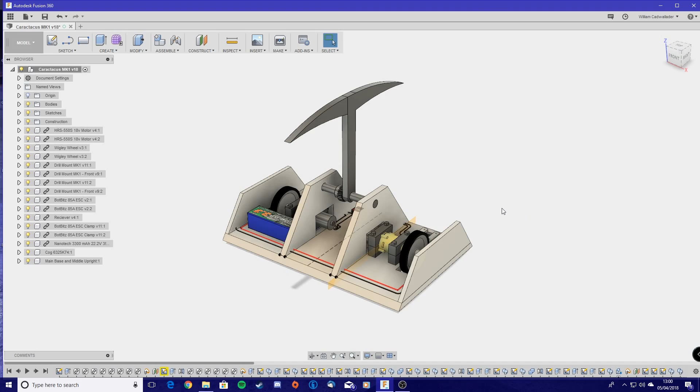So let's get going. So here we are in Fusion 360. This is the model of Caractacus that I made. It's a bit basic, there's a few things missing, but it's not too bad. I was actually thinking of submitting this for TFI's Render Wars, and you should really go check that out.

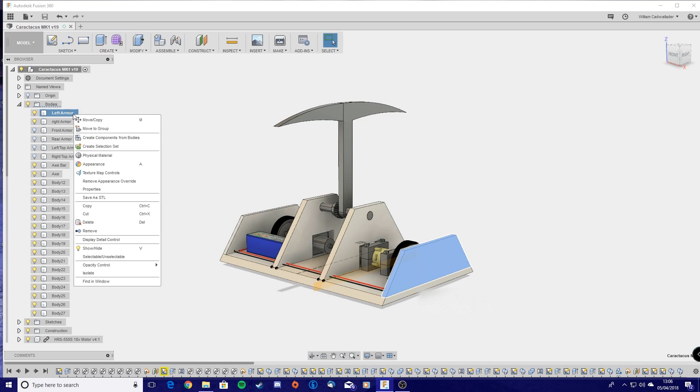So what I'm going to do first is tell it to create components from body. Scroll down here, our component will be down here, and now from here, now we've got it as a component, we can go create drawing, click OK, and then it tells you we've got the one thing.

We don't want the full assembly, so it's already selected that one part we want. Create new from scratch, that's fine. If you had templates, you can select which template you want, and then this is important.

All you've got to do here, you don't need to worry about actual paper size, because I'm going to show you how to tile that in a minute, but you need a paper size that's big enough to house your parts. So in my case, A3 is a good size to fit that.

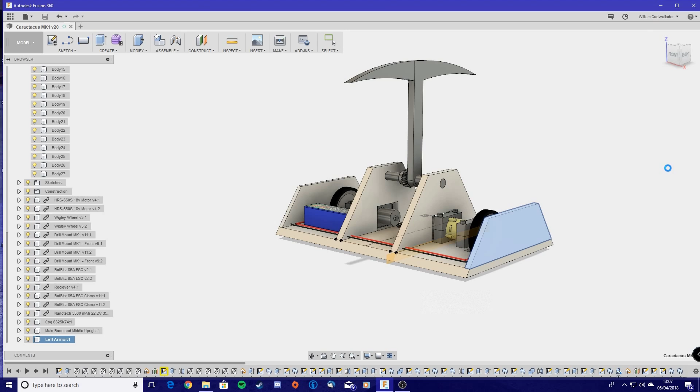So hit OK, and it'll pull us into the drawing, and then what we've got to do is select right view so we get the full view, and then because we're going to be - if you were just doing a proof of concept, you might have it like 1 to 5, 1 to 10, but we actually want it 1 to 1, so we can stick it down and cut round it. So boom, click there, that's where we want it, that's fine.

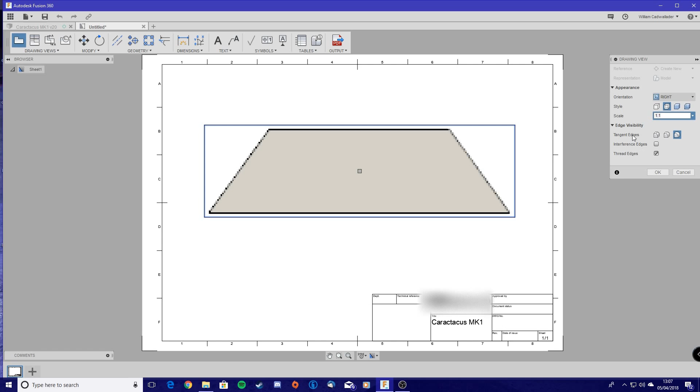That's all we really need to do there. Hit OK, and you'll see it'll pull it out and just pull that part out for us, which is perfect.

So this is an optional step, but I like to do that. If you hit D for dimension, you can select and get it to show what these dimensions are. Obviously you're probably not going to want to bother too much about measuring, but this just helps you measure the actual part itself, and gives you an idea of whether it printed out to scale. Which is also good to do.

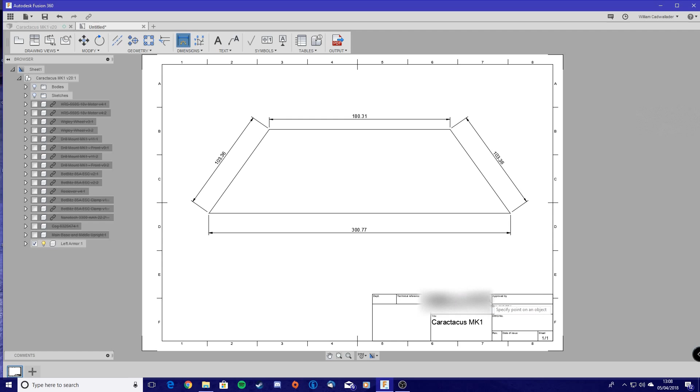And down here I'm just going to double click this, and change a few things. So what I just did there was add to the title so I know what part it is, and it also gives you the date, name, whatever. You probably saw my full name before, but I just shortened it because I can't be bothered to have my name overlapping everything. So yeah, that's all we need to do now.

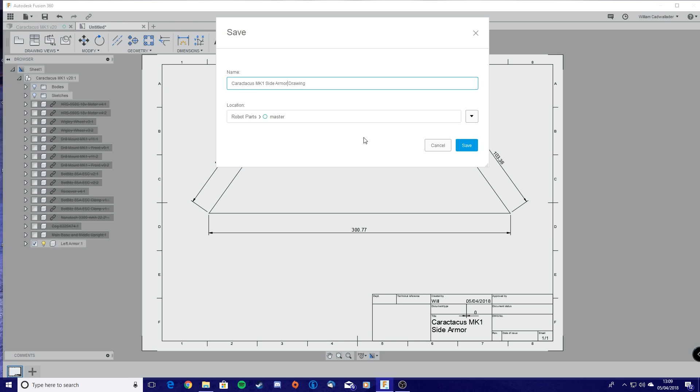That's literally it. So if we then hit - I like to save this as a drawing. If we put it down here, I have actually got a drawings folder.

Save, just in case you want to make any adjustments or add to it. You can add multiple components into this to have more than one view of one thing, if that makes sense. But I'll do a more in-depth video on that later on if anyone's interested.

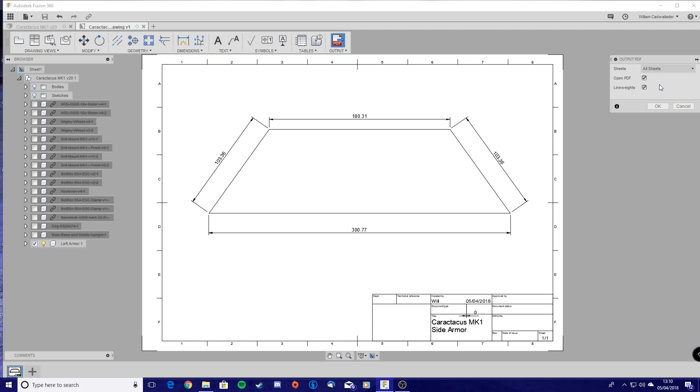So our main thing we want to do now is actually output as a PDF. If you hit output PDF, all sheets, we'll have it open so we can see it afterwards. That's optional. Leave line weights as they are and just hit OK. As you can see, I've already got my part templates in there, so I'll just call it Mark 1 side armor drawing. And then we should see it as a PDF, open perfectly.

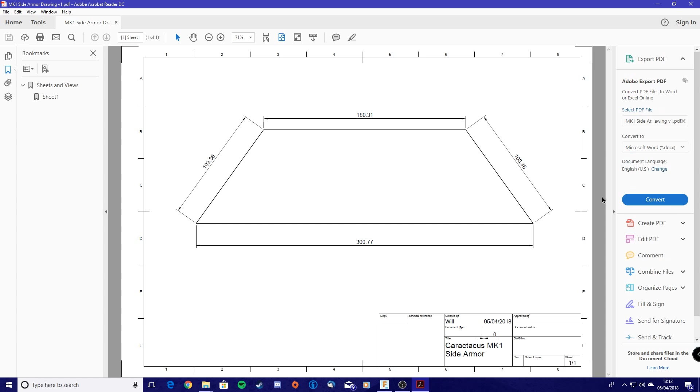So I don't know why I said it like that, but just go with it. So the next step is to actually get it printed out. If we go up and hit print up here, by default it's going to be on size, and it's going to want to try and scale it to fit the paper that you're using, but we don't want that.

We want it to actually print to scale. So if you hit poster inside of here - this is Acrobat Reader DC, which is the latest version, and you can download that from the Adobe website - there's a tile scale whether you want it to be bigger or smaller, but we want it to be 100%, so we'll leave that. Our overlap, we actually want to be slightly bigger than default.

If you were just going to put them all together and sort of stick them to a wall, you might be alright with 0.005. But in this case, I like to put 0.2, just to give a little bit more meat in between the bits so we can stick them together.

We want cut marks. This is optional, but highly recommended, because this really does help you line things up. You can see exactly where each piece is going to line up with the next one.

Labels, it's up to you again. I think it labels each sheet so you know where they go, but I'd leave that off so it doesn't encroach on anything. And then tile, only large pages would be used if you had mismatched pages.

So if you had some pages that was A4, but then other pages that were like A3 or A2 - if you had multiple ones in one document, you can hit this and it'll tile only the bigger pages in that thing. It'll print the normal A4 ones as is, which is pretty good.

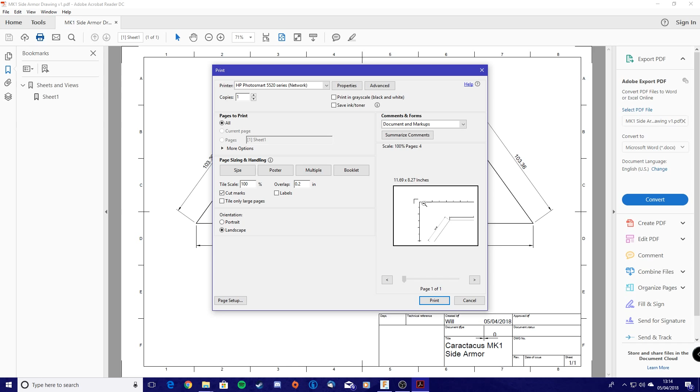So that's really all we need to do. If we click on each panel, we can see exactly how it's going to come out. We'll try landscape, see if that comes out a little bit better. Yeah, I think landscape looks a little bit better, so we'll do it as landscape. I don't think it makes much of a difference either way, to be fair. I don't think that made any difference whatsoever, so that's useful.

So we just need to hit print now, and we'll see the result. Okay, I hope you can see this all right, but this is the best angle I've got to try and demonstrate this. But we've got our printed off sheets now. Makes a change for me not saying 3D printed, doesn't it?

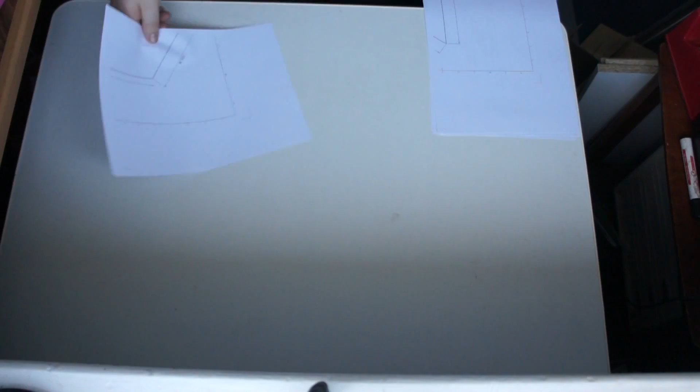So I'm going to show you these as they are the right way up first, and then I'm probably going to then put them my way so I can actually see. But you see, there we are - that's our template design. So what I'm going to do now is cut off two of the edges that are going to be adjoining, so they all then line up nice and neatly.

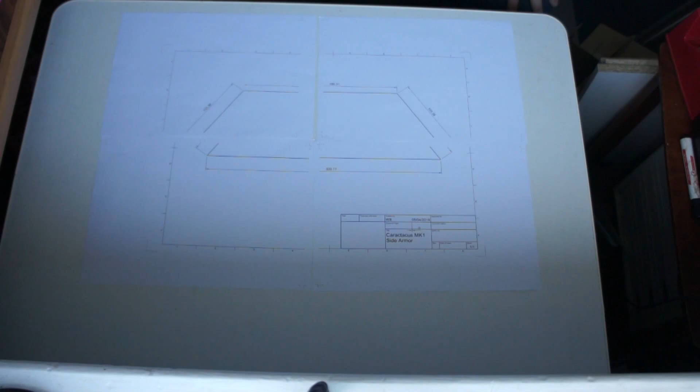And for that, I've got this appropriately coloured pink guillotine thing, which I borrowed from my mum's crafting stuff. So I'm going to flip these around, and get cutting.

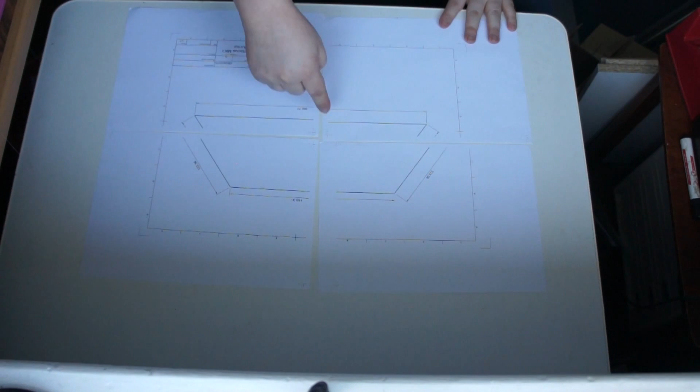Oh, incidentally, before I do that completely, just to let you know, I'm going to be cutting off the top and the right of each one. So anything that's like this one here, in your case will be this one here - but anything along this edge and this edge obviously doesn't matter because it's not touching. Anything that's going to be touching another sheet of paper, I'm going to cut the top or the right off.

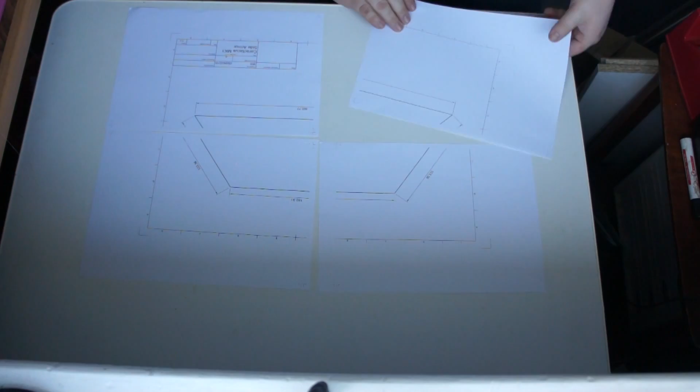It's good to keep to two sides like that, or you'll really confuse yourself quick. Also, if the camera picks it up, you can see the little cut marks in the corner - I'm not sure how well that's picking up, but there's cut marks there. That's what you want to line up to. I think the middle line is the bleed, and the two other sides are the edge of each sheet. So it's a good way of lining things up. I'm going to get that going now.

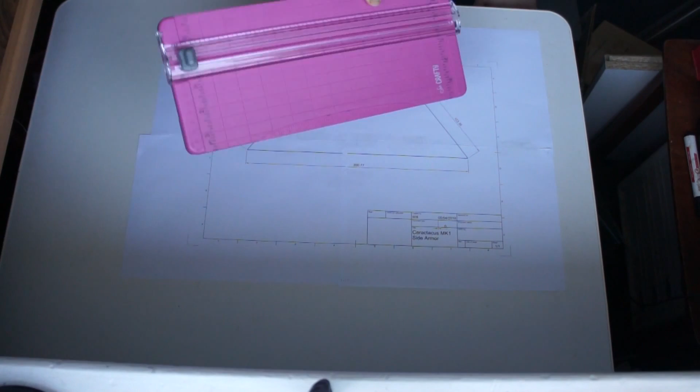There we have it. I actually made a few mistakes on this, which I'll warn you of now. I tried to cut with this particular cutter - if you've got a decent one, you probably won't have this problem. With this cutter, I tried to cut too close to the edge, and it scraped some of the paper up a bit, so that was off. And that threw me off with lining these up so badly. I had to cut these and sort them out a few times.

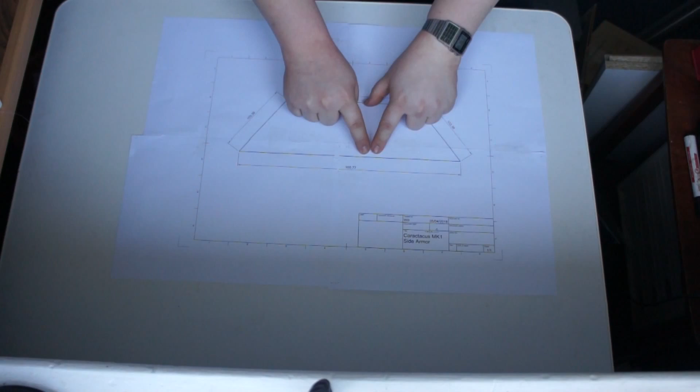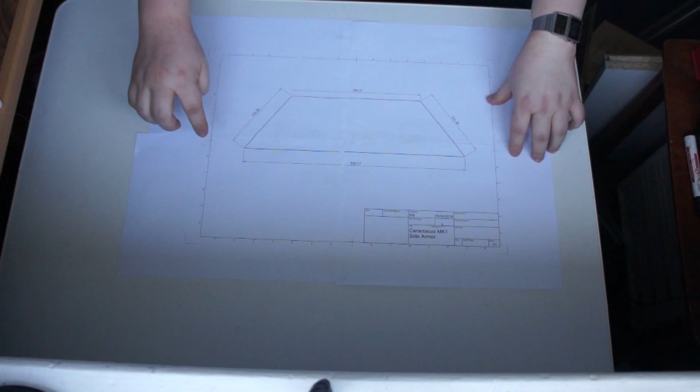But I found a really good way of making sure these angles are correct: starting with a straight measurement, measuring it once you've got them two lined up. In this case I measured from there to there, which is 300, like 300.1, near as damn it close to that. So I stuck them together, lined all these lines up - that's where the joins are, line them up, line these up first, and then I lined the join up at the bottom. That was it.

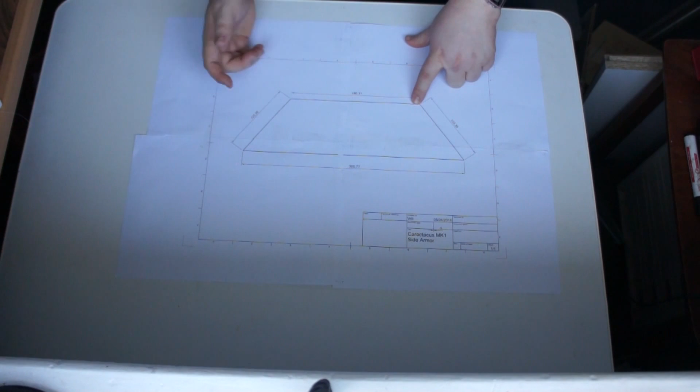So line those up so they all look right, and then I rearranged these together, which took a bit of messing about, so I stopped the camera and fiddled about. Line these up, and then I measured these. It's not perfect, but this is 180, which is exactly what you want. So all these are practically, yeah, practically alright. And plus, we're not going for ultra precision.

If you wanted precision, you'd take your design as a PDF and send it off to get it printed at a local place that can do A3, A4, A2, A0, A1, whatever size sheets you want, and have it properly printed to scale. But since this is a quick, not ultra precise but kind of precise way of doing things, this is actually a really cool alternative.

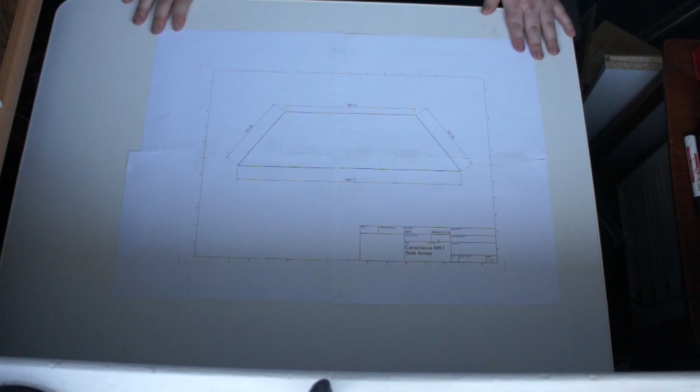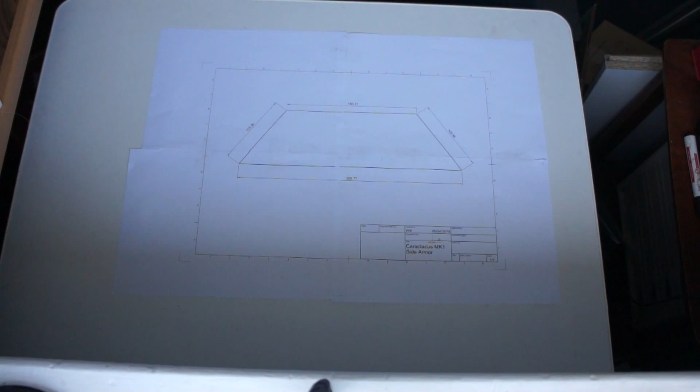The next step is actually just sticking it to a piece of wood and cutting it out. This is a really good way, for me personally, of prototyping, making sure everything's going to fit before I commit to buying the HDPE, which is rather expensive - about £150 for a big sheet, which is what I need. So it's fairly expensive, but it's good stuff, so it's not bad.

Next video will probably be either building this, actually sticking it to a piece of wood and starting the prototype, or doing some more with the ESC mounts and that kind of thing. I think I spoke about it in the previous video, although I've lost all the footage for that, so I'll have to do it all again.